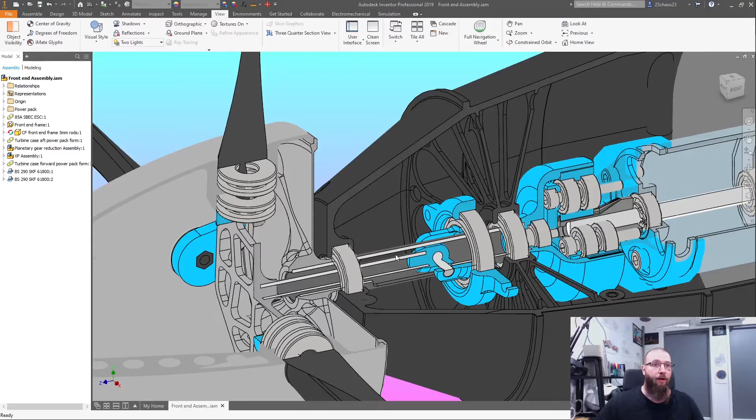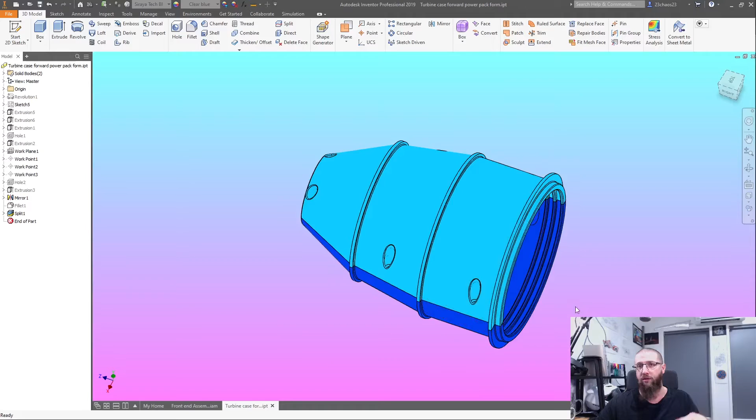I've been working on the forward motor casing, working on the bearing runners and stuff. I've actually designed this casing now - instead of being one big round piece, I've split it into two parts, and it will be bolted with 6 socket head screws, and that way I can capture the bearings. If I want to take it apart, I can remove the whole drive shaft and prop assembly with the motor, the belt, and the ring gear.

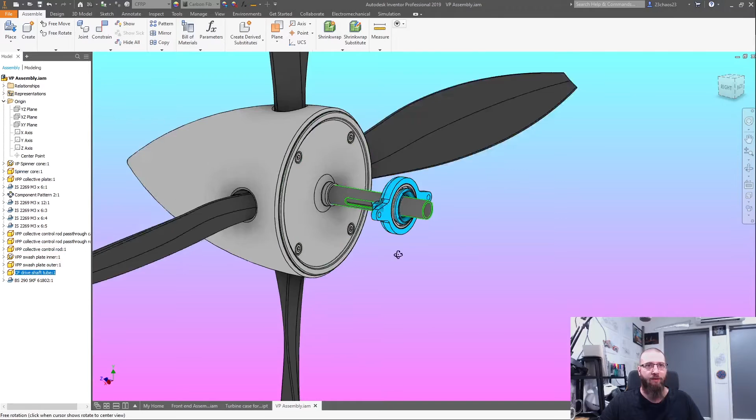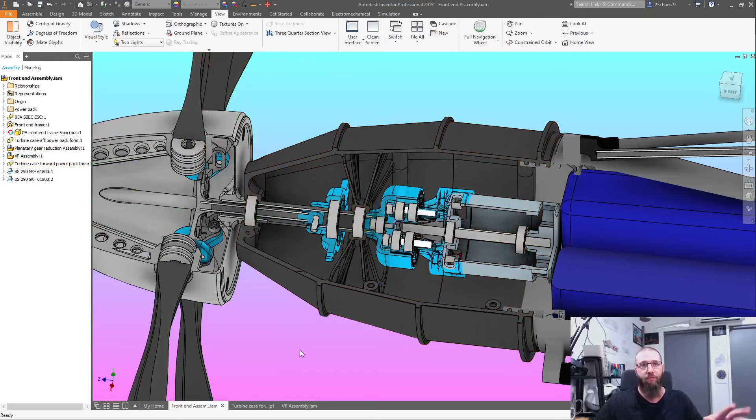So on this, let me open it up. This piece will be removable. But the drive shaft and this spinner cover - the core that connects the spinner hub and everything to the drive shaft, as well as the ring gear, the bell housing for the gearing - that's all going to be one solid piece. When I take it apart I need to be able to take it apart in certain ways, and that's why I decided to split this casing.

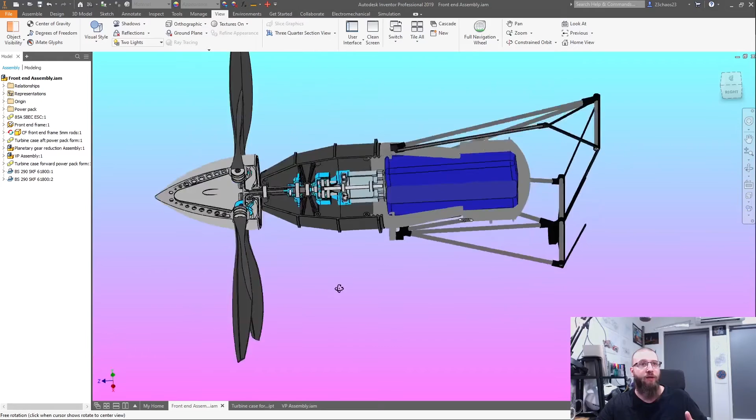Also, I've added in these grooves and channels that run around the outside, so that when I clamp this casing together it actually attaches to that whole casing, and then that whole casing attaches to the airframe. So I like that so far. I now just have to design some more parts for attaching this part of the motor - this has to be fixed to that casing, and then this part is actually okay.

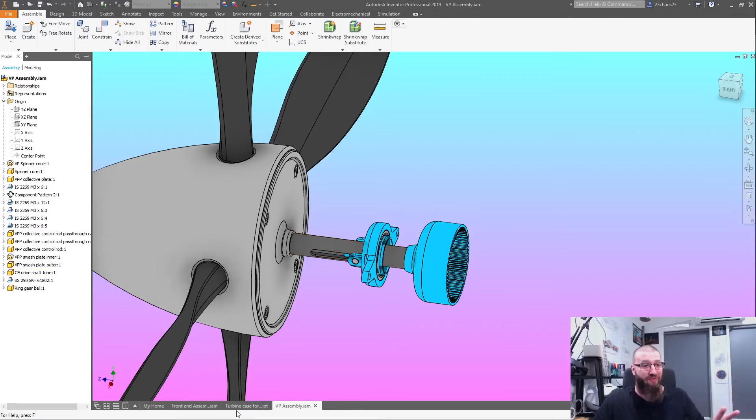So yeah, all of this will be one piece minus this, which, come to think of it, is not going to be so easy to remove. Alright, so that'll all be one piece - don't worry about it, it gets put together, it doesn't come apart. I'll just have to make a new one if it breaks. And that all gets captured inside of this, which sits inside of here.

Fantastic, so that's what I've got done today so far. I'm going to go edit this video now so I can get it uploaded for you guys, and then spend the rest of the evening working on the next Draco episode. I'm going to break my day up - first part I do YouTube management, read comments, reply to comments, do Chaos Daily, and then for the rest of the day I'll work on the main project I'm on at the time. In this case it's the Draco RC, so I'll start working a bit more on the Draco RC video coming up in a few days.